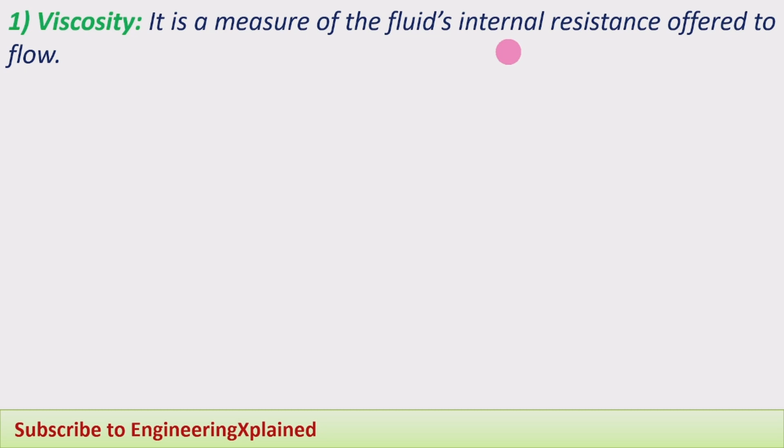Therefore, the viscosity plays an important role for the power which is required for the flow of the fluid during its operation. That's why the fluid we are going to use should have less viscosity. The next one is viscosity index.

The viscosity index means here the viscosity of the oil varies with respect to temperature, and the viscosity index should be higher. That means the variation of the viscosity with respect to temperature should be less. It should not vary, so that the system can be operated at different temperatures, at higher as well as lower temperatures.

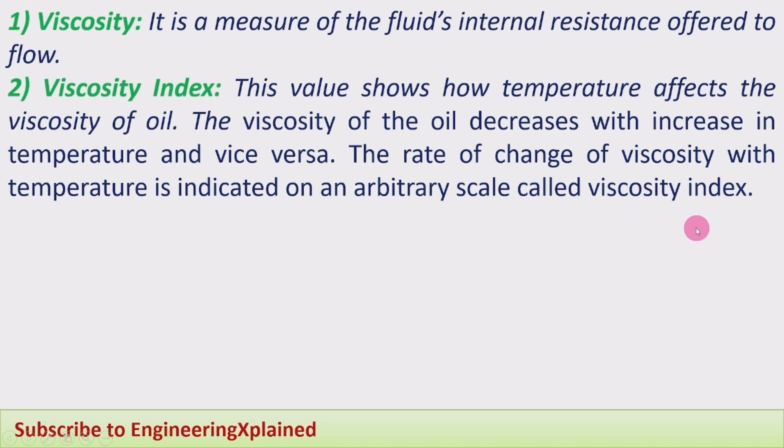And this value shows how the temperature affects the viscosity of oil. The viscosity of the oil decreases with increase in temperature and vice versa. The rate of change of viscosity with temperature is indicated on an arbitrary scale called viscosity index. That variation is measured. Okay, that should be lower. Third one, oxidation stability.

Whatever fluid we are going to use should not react with oxygen, either oxygen present in the oil itself or from some dissolved air in the oil. If it gets oxidized, it will lose its stability, and that is the reason it should have oxidation stability.

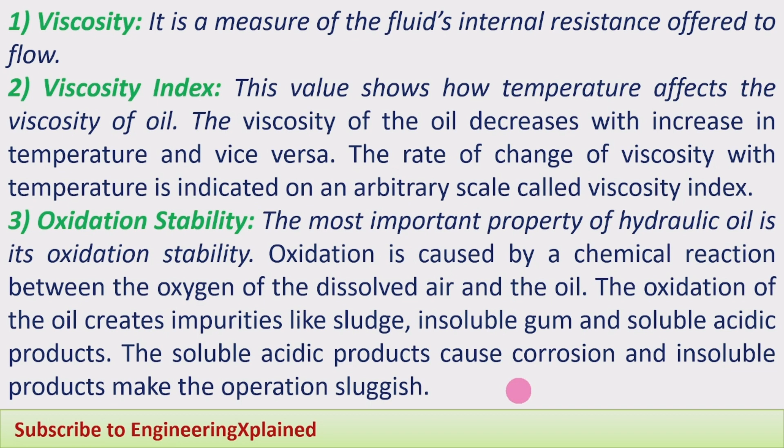The most important property of hydraulic oil is its oxidation stability. Oxidation is caused by chemical reaction between oxygen of the dissolved air and the oil. The oxidation of the oil creates impurities like sludge, insoluble gum, and soluble acidic products. The soluble acidic products cause corrosion, and insoluble products make the operation sluggish. That's why the oil to be used should have oxidation stability.

Further moving, next one, demulsibility. Demulsibility means the ability of the hydraulic fluid to separate rapidly from the moisture and successfully resist emulsification. The emulsion formation.

Emulsion formation means, whenever the oil is working in the system, it should not mix with the moisture present and form what is called an emulsion, which has higher viscosity and is not a good working fluid. It should not tend towards forming that emulsion. That's why it should have the demulsibility property. It should not become an emulsion during its operation.

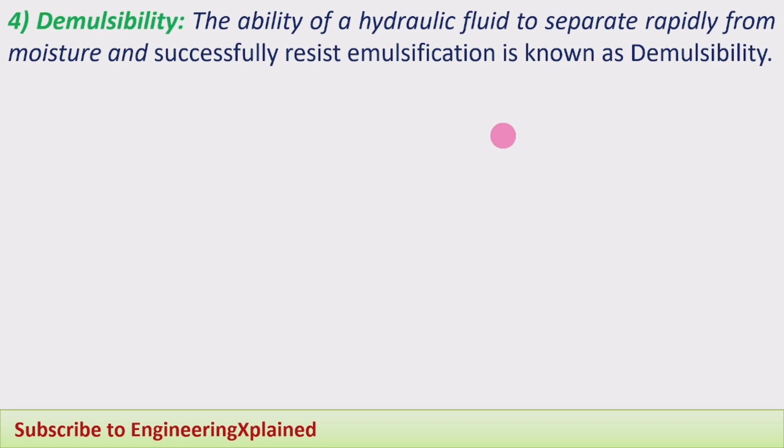Next one is lubricity. Here, one of the major benefits of the hydraulic system is that all the moving parts present in the hydraulic system are to be lubricated in order to reduce their friction. And the hydraulic fluid we are using in the system will serve the purpose of lubrication. That's why it should have lubricity.

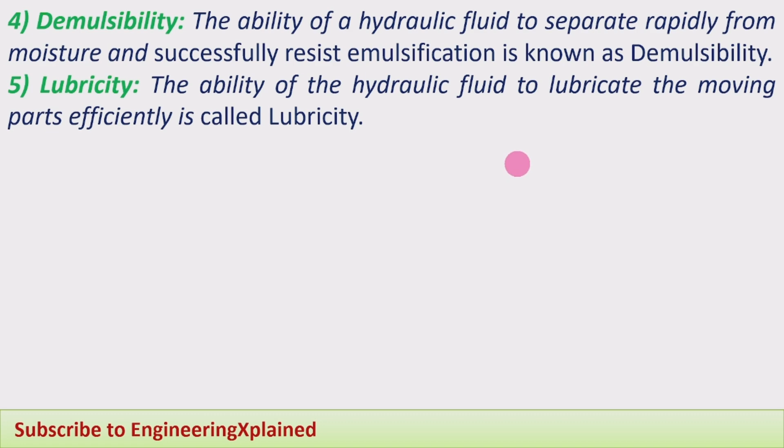The ability of the hydraulic fluid to lubricate the moving parts efficiently is called lubricity. The hydraulic oil we are using should have the lubricating capacity, that is called lubricity. Next one is corrosion prevention.

Here, the hydraulic fluid we are using should not react with the metallic parts present in the system, and it should also avoid exposure to oxygen to form corrosion. That's why the oil layer formed on the surface of the metals will prevent corrosion formation. That property it should have.

The moisture entering into the hydraulic system with air causes the parts made of ferrous materials to rust. This rust, if passed through precision-made pumps and valves, may scratch the nicely polished surfaces. So, inhibitors are added to the oil to keep the moisture away from the surface.

And that oil layer formed on the surface will keep away the moisture from the surface, so that the ferrous rust formation or corrosion formation will be eliminated.

Next is pour point. The pour point means the temperature at which the hydraulic fluid will get solidified, usually at a lower temperature. That we call the pour point, or we can call it the freezing point also. It should not freeze to form a solid, so that it can work over a high range of temperature. At a higher temperature it can work, and also at a lower temperature.

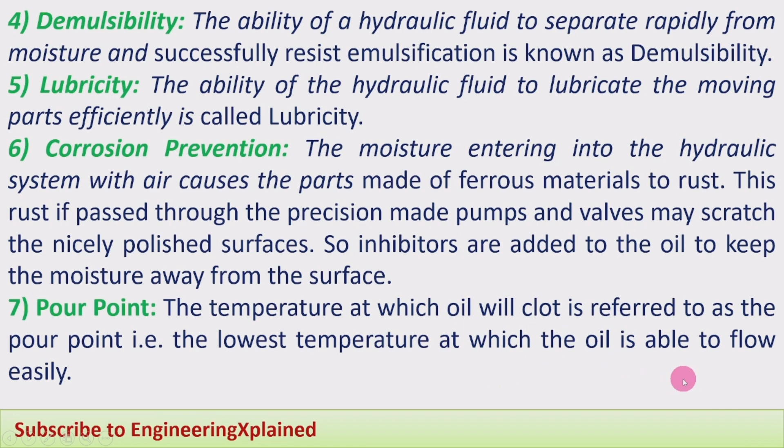And whatever hydraulic fluids we are using, in some of the cold countries where the temperature is below 0 degrees Celsius, at that point also this working fluid can be effectively used in the hydraulic system. That's why it should have a lower pour point. The temperature at which oil clots is referred to as the pour point. That is the lowest temperature at which oil is able to flow easily. Okay, above that it will flow easily.

Moving to the next one, flash point and fire point. The flash point, we already know the definition. Momentarily the fluid catches the flame and flashes into flame. That is called the flash point. And the fire point is the temperature at which it catches fire. Okay, it is ready to burn. And those two temperatures should be higher, so that the system can work in a higher temperature environment also.

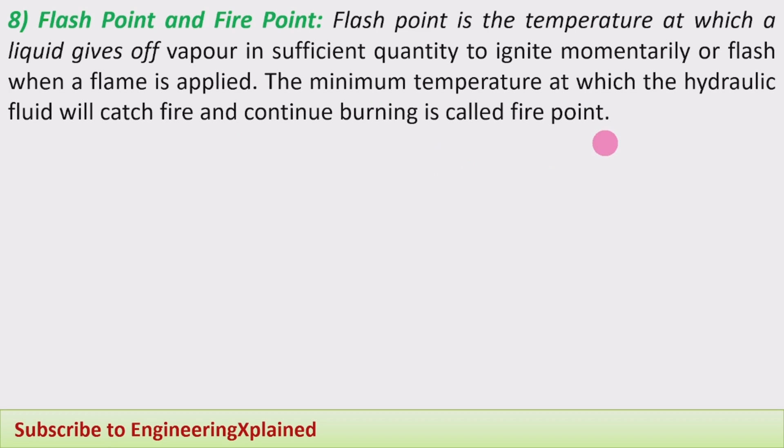Flash point is the temperature at which liquid gives off vapor in sufficient quantity to ignite momentarily or flash when the flame is applied. The minimum temperature at which the hydraulic fluid will catch fire and continue burning is called fire point. These two temperatures should be higher.

The neutralization number. The neutralization number is a measure of acidity or alkalinity of a hydraulic fluid, and this refers to the pH value of the fluid. High acidity causes the oxidation rate in an oil to increase rapidly. The neutralization number means it should not be acidic, it should not be alkaline. It should be closer to neutral. Okay, that is called the neutralization number. It should have a better neutralization number.

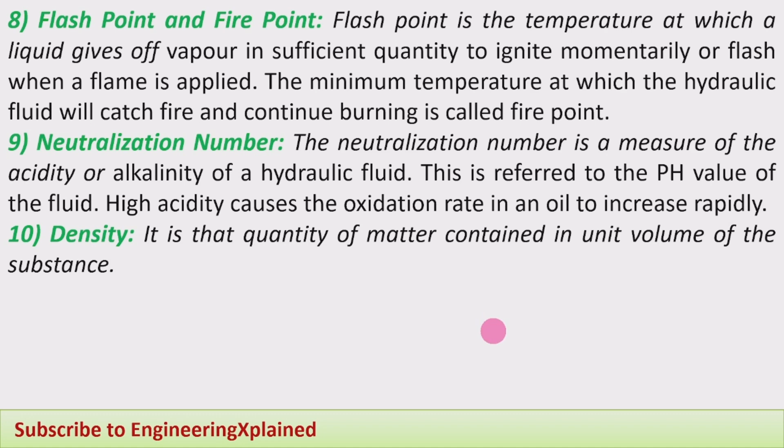The 10th one is density. Density is the quantity of matter contained in a unit volume of the substance, that is mass per unit volume of the substance. It should have a lower density so that its weight will be less and its volume will be more. Okay, by that the total weight of the system will be lower, so that with lower weight we can get higher fluid work.

The last point is compressibility. Here all the liquid fluids we are going to use are incompressible, as we already know from the properties of fluids. It should not compress during working. The compressibility of the fluid should be very low, so that it will not get compressed during working. Here higher pressure we are going to apply during the working of these hydraulic systems. With that high pressure it should not get compressed. Ensure that the fluid has lower compressibility, and then we can use it as the hydraulic fluid in hydraulic systems.

All fluids are compressible to some extent. Even liquid fluids are compressible to some extent, but gaseous fluids are compressible while liquid fluids are considered incompressible. The compressibility of liquid causes liquid to act much like a stiff spring. Okay, if it is not compressible, it will be a stiff spring. The coefficient of compressibility is the fractional change in a unit volume of a liquid per unit change of pressure. Even the fractional change should be minimal.

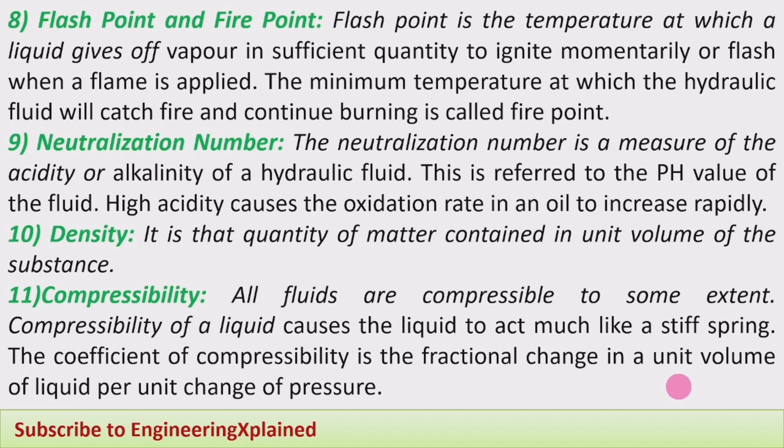These are the different properties of the fluids. Those should be as per the requirement in order to use a particular fluid as the hydraulic fluid. And all the fluids, naturally available or manufactured, do not have all these properties, so they require some additives to be added. What the requirements are for using hydraulic fluids, and what additives we are going to use for the hydraulic fluid in order to get the desired properties, I am going to explain in further sessions.